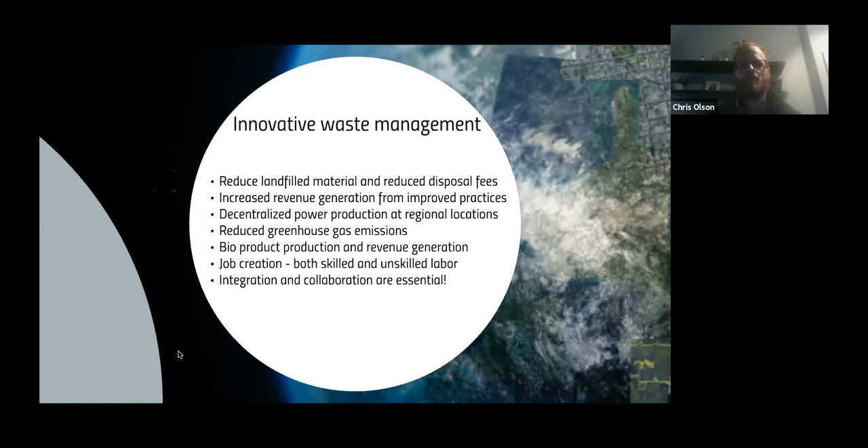I really am grateful through this project, and with one of the colleagues who put this project together with me—he was actually the guy who introduced me to Marc—Tom Ogarenko. We've really tried to focus on integration and collaboration as being essential to making this work, not just the technology, but the skill sets and expertise. That's really a focus of what we're trying to do with this project.

So the solution we're looking at is the All West Bioindustrial Park, located off 75th Street and 64th Avenue here in Edmonton. You can check us out at awbip.com. My company, IRSI, is shown on the top right, and All West Demolition is a prominent demolition company that's the lead applicant on the project and is home to the location we're at.

Nelson Environmental Remediation is a leading soil remediation company with technology very similar to what we operate for indirect pyrolysis. And I can't stress enough the support we've gotten from Alberta Innovates, not just from their funding group but also from their applied research arm, InnoTech Alberta. They've helped us with this project and with other projects in the past, and I can't speak highly enough about the support I've gotten from them.

The All West Bioindustrial Park is intended to be an industry-led bioindustrial ecosystem aiming to drive commercialization of innovative technologies, processes, and products through the collaboration of business, academia, researchers, and government.

When I got started doing this about 6 years ago, after I'd fabricated my first system, we looked for about 8 or 9 months to find a space to field demonstrate the equipment. It was really quite a struggle just to be able to get somewhere and do some testing, and essentially find out that we had built something that didn't work all that great.

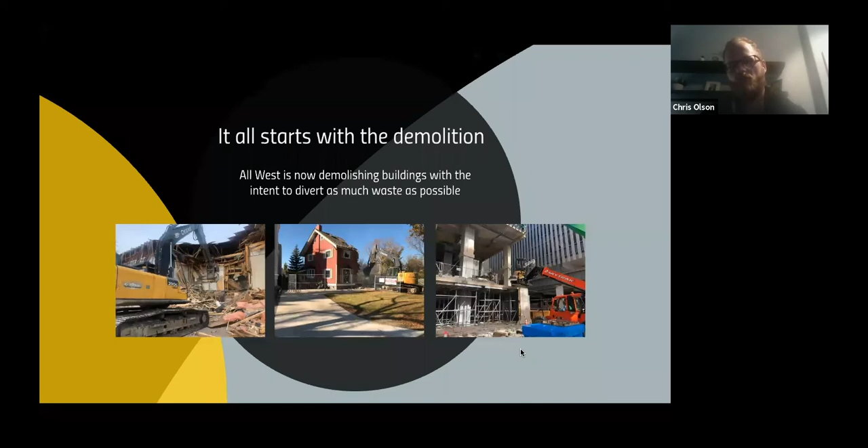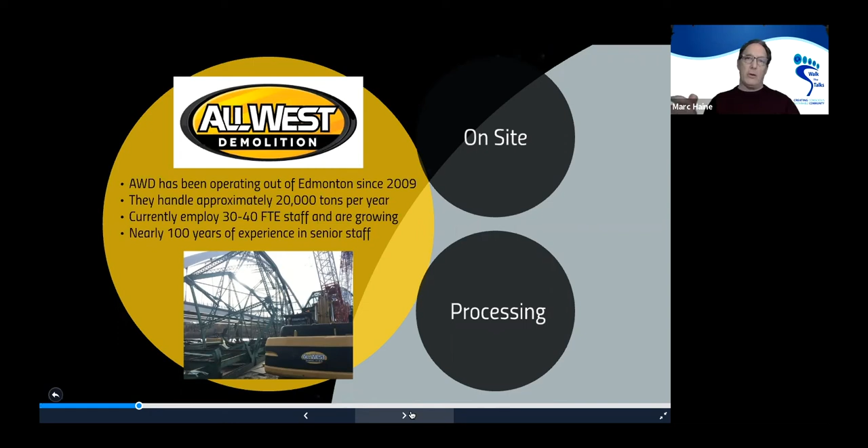And I think it saves them some money as well, doesn't it? A little bit more labor on the upfront, but then they can separate the concrete and get money for that, as well as then separating out the rest. Yeah, 100%. And that's what we're trying to add, giving an option for the biomass material, because for concrete and metal, there's a market for it.

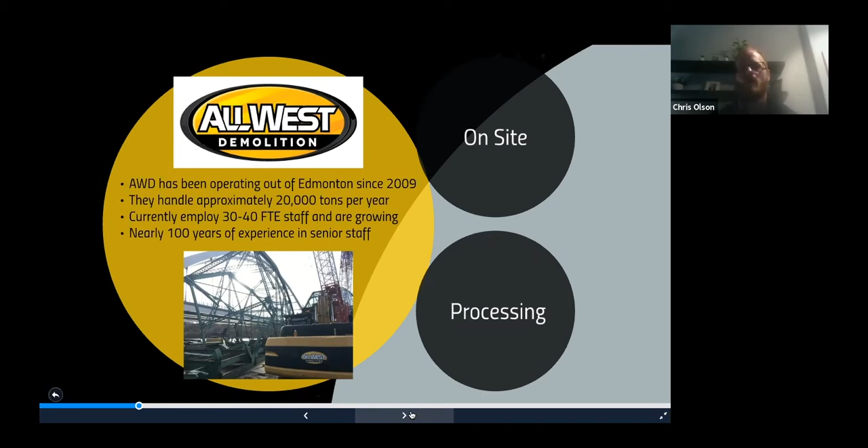So once the material is brought to the yard, that's where we start processing it. The front end pre-processing is done by All West for us at the site. They'll do manual sorting of waste streams. Some of their operators are quite capable with an excavator, much better than I could ever be operating that heavy equipment, and they'll actually start pulling out large pieces of wood material that we can separate out into our clean wood pile for our pyrolysis process.

They'll also do shredding of the material to get it to an appropriate particle size. Our gasification equipment needs about 4-inch nominal, so average size under about 4 inches, whereas our pyrolysis process, we wanted about 2 inches. So different materials going into different systems will shred to a different particle size.

They'll also trommel our material, so they'll screen out some materials. The fines that we get actually have some applications for different sites. Some landfills will take the fines as an alternate daily cover, which helps control odor at the landfill and helps with gases leaching out, that sort of stuff.

So what we're also trying to do is really sourcing different uses for these materials that we can't process ourselves. Once we get it, our goal is to really landfill nothing. Now, we're not there yet, but as we go through our process, we want to identify as many opportunities for any of these other residual materials that we don't particularly have an application for. We've talked with different biocomposite groups, and with people doing things around improved concrete, reduced carbon intense concrete applications, and there's potential uses for a lot of this stuff that we can get out of the site.

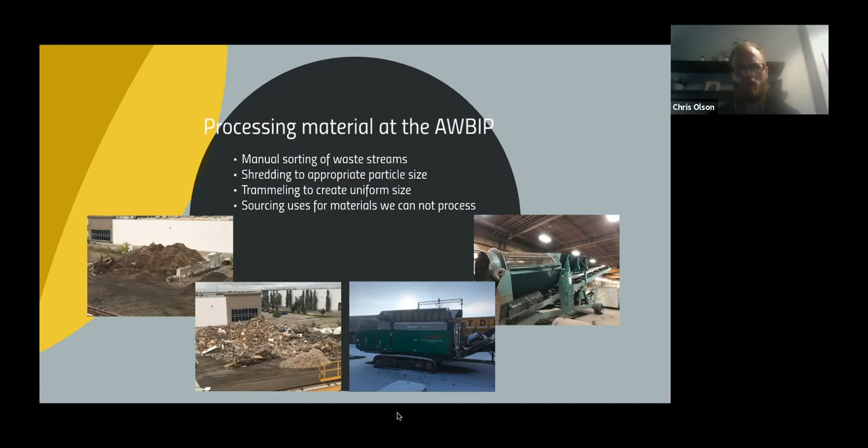Nelson Environmental Remediation is a key partner in this project as well. NER was an Alberta born and bred company that has been operating since the 1980s. They're globally recognized as leaders in direct and indirect soil remediation. They do a lot of work all over the world, a lot of work in the United States, and they have projects in China. They actually don't hold any patents on their technology, which is kind of interesting - it's all trade secrets. So you could copy their technology, but you don't know how to run it. The skill set and expertise that they have goes a long way, and we've been very fortunate with Warren Nelson specifically supporting us with some of the work that we're doing.

Warren and his brother Daryl have led NER since 1994. They currently maintain the largest fleet of thermal desorption units in North America. I'll explain what those thermal desorption units are in the next slide. Many of their upper management staff individually have 25 years of experience.

Over the last few years, they've been developing a focus on environmental stewardship, and part of that is what we're doing with them at the site. If we can find them an alternative low-quality biomass material that could replace diesel, propane, or natural gas, then that has value for them and other benefits as well.

Their indirect thermal desorption units are very similar to our piece of equipment that we're running at the site. So what exactly is an indirect thermal desorption unit?

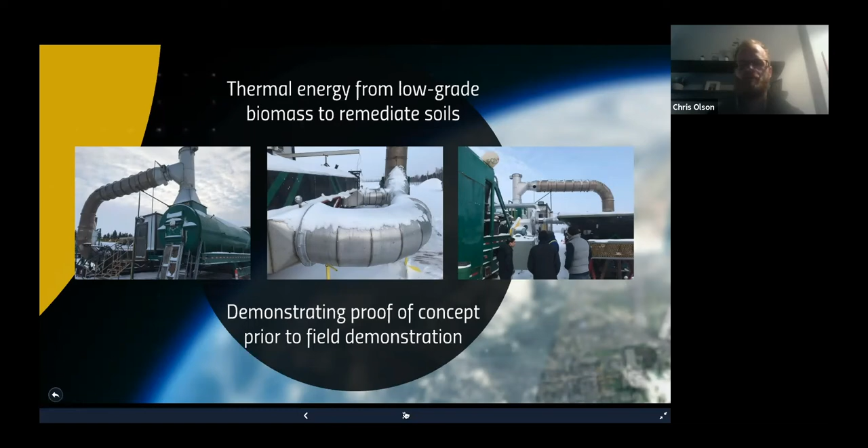So another part of what we're doing at the site, I mentioned Tom a little bit earlier, Tom Ogaranko, had worked with Marc in Devon and had done some of the challenge dialogue work. That was when I first met with Marc, actually, probably about 5 years ago now. I believe it was 4 or 5 years, I think it was January 2016.

So the challenge dialogue system, and some of you might have had some experience with that process, is a proven framework to help diverse groups collaborate and innovate to accomplish complex tasks for change and transformation. The real great piece of the CDS methodology is that it's for problems or challenges that there aren't readily available solutions for, that typically need a number of perspectives to get a good handle on.

The example I'll use to walk you through this 8-step wheel, we looked at doing a waste characterization challenge at the park when we got started. We identified early on that we need to identify the different composition of waste streams coming into the park. So if there's a construction and demolition bin, if we can tell that approximately 60% of that bin is biomass, it's worth us picking out that wood material. If it's 20% biomass, it may not be worth it. So we wanted to be able to identify waste streams as they came into the site.

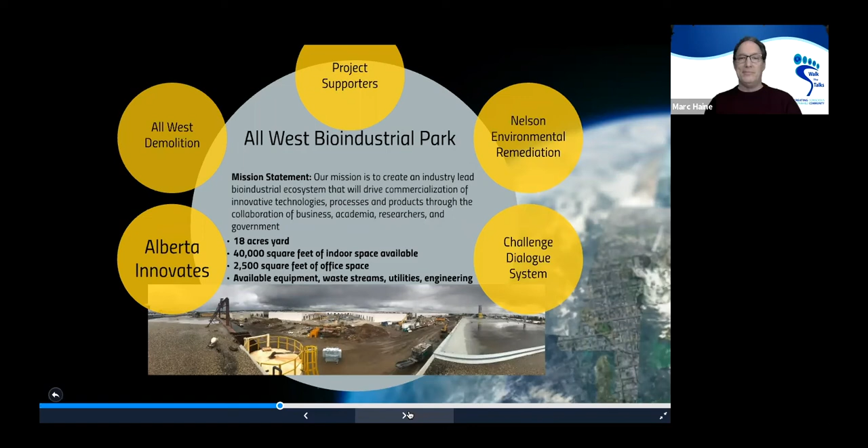So just so you know, the challenge dialogue that we did in Devon was the catalyst for Walk the Talks, because after we had finished off with our challenge dialogue system process, we realized as residents that we still had a ton of questions. And so Walk the Talks was formed because of all the questions that happened out of the challenge dialogue. Yeah, and that's typically what I've seen is that sometimes you don't even know you have the questions until you go through the process, and then there's all these other things that kind of come up.

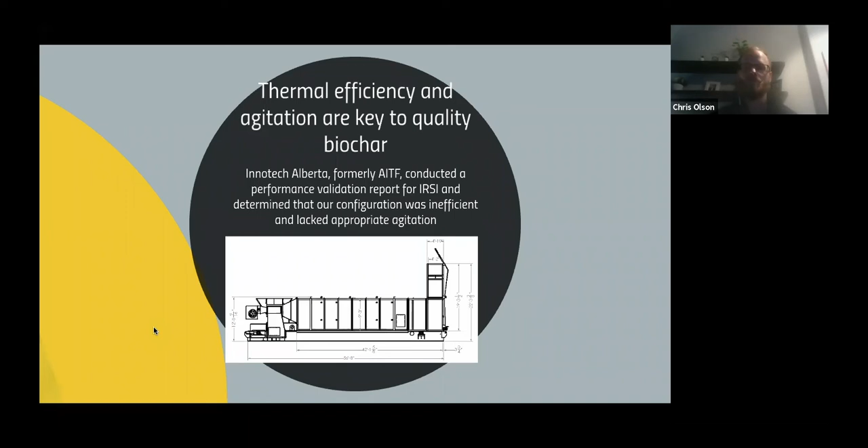Now that seems like a huge waste, but with the thermal energy we were using, we were still able to produce a fairly good biochar, so that was positive for us. But we definitely sat back and thought we could come up with a better way to configure the technology.

So the positive takeaways we had: we did produce a really high quality biochar. It met class 1 IBI standards, which is above 60% carbon. The biochar you see in that photo was about 80 to 83% carbon, so really quite a high quality product.

When we had the technology running properly, it came out fairly consistent, and we were able to produce fairly high volumes compared to other technologies we've seen in the market. We got about an 80% reduction of feedstock by weight, and there was an abundance of usable thermal energy at that site as well.

That 80% reduction of feedstock by weight is a bit of a double-edged sword depending on what you want. If you're after high quality biochar, you want the highest amount of remaining biochar possible, so you want that reduction lower. If you can get 30% of your solid byproduct coming out as biochar, that's terrific. But if you're just looking to get rid of waste, not focused on producing raw biochar but rather treating waste materials, then getting as high as a 95% reduction is even better, since you're just getting rid of more material.

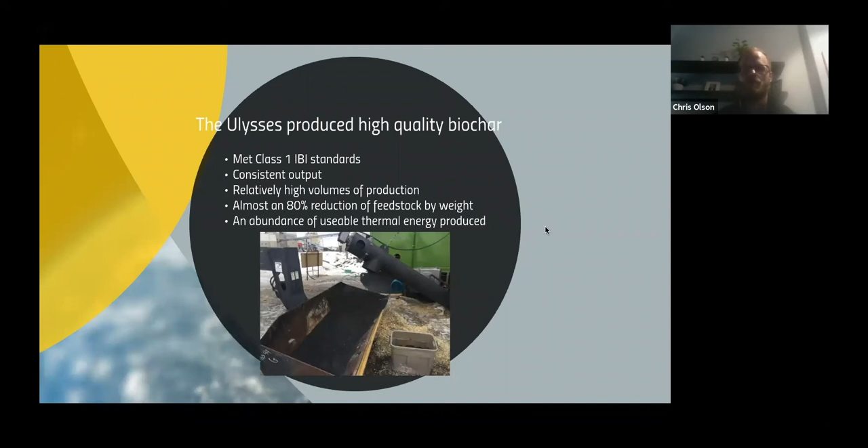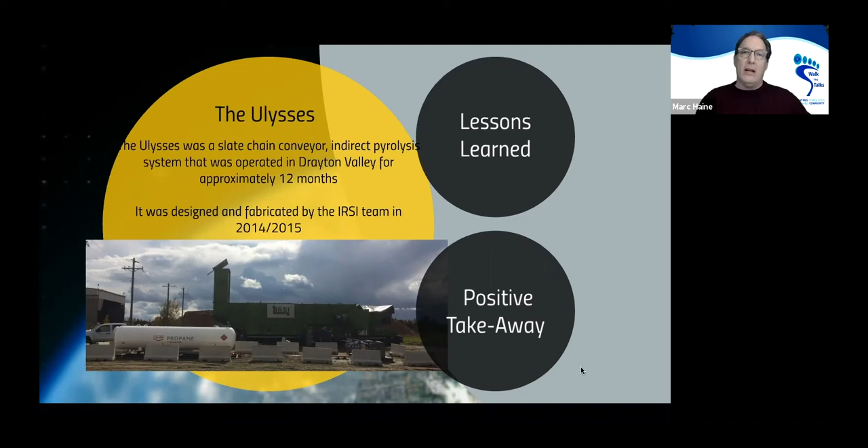So this begs a little more emphasis, because what you're saying is out of 100 tons of waste product that goes in, you end up with only 20% of that as leftover product. That's huge. That thought right there is what hit me when I was running the capstone project with Nate — if we can get rid of 80% of this material, even without a saleable product on the back end, that seems like a very viable activity to undertake. We're fortunate in Canada to have a lot of space, but eventually we're going to stop wanting to landfill material. If we can reduce that material and get some value out of it, it's huge. That was the genesis for me.

So I've talked about our technology and where we're at. Let's look at what exactly raw biochar is. But first, since you mentioned the process, how long does it take from beginning to end? Our indirect rotary kiln system, running with about 25 to 30% moisture in the wood material, takes about 26 to 29 minutes to run through the process. Depending on the technology used, how much the material is agitated, and moisture content, that'll dictate how long the process takes. You can run very fast pyrolysis processes at high temperature that fully char material in under a couple minutes.

We run closer to the slow pyrolysis process. Part of the balance is that the higher the temperature and the quicker the time, the more gas and liquid fuel you'll get out, and the less solid byproduct — so less marketable biochar after. There are companies whose focus isn't on the solid biochar. One out of Quebec, Abertech, runs a retort auger focused on producing usable syngas. Here in Alberta, in the land of oil and gas, I don't see as much value in that syngas, so we consume it all in our process. We want the raw biochar. The slow pyrolysis process, with a longer residence time and milder temperatures around 400 to 500 degrees Celsius, gives us a higher output of biochar. That's our focus.

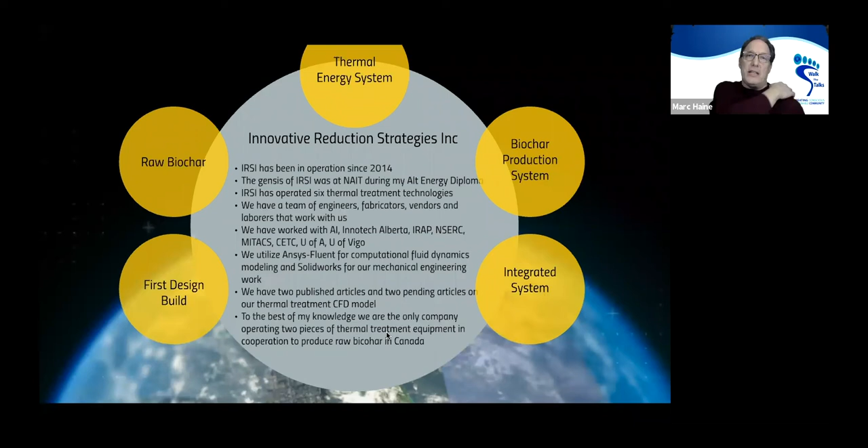Okay, I'll let you continue with the presentation. I'll save the rest of the questions for the end, since you might answer some of this as you go on to talk about the current system.

So, what is biochar? It has been used for millennia as a soil amendment. One of my favorite stories is when the conquistadors first came into the Amazonian basin — driving up the river, they were floored at how densely populated the communities were along the river basin. They eventually found out the soils were so rich and fertile because the people used a biochar process to create what they call terra preta, or black earth. This terra preta was essentially char mixed with compost and other waste materials to make a rich fertilizer. To this day, in that part of the world, that product is still dug up and sold as fertilizer.

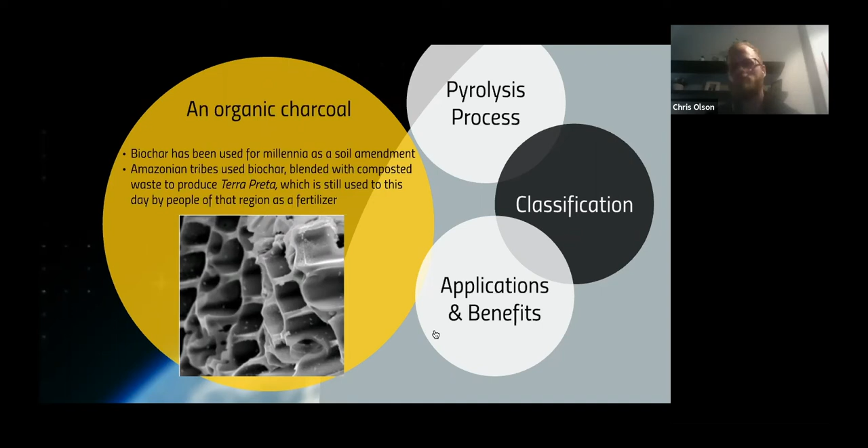This photo here is a microscopic image. Essentially, biochar is a big empty hotel — it's empty space, very porous, anywhere from 100 to 900 square meters per gram of surface area, depending on the type of char produced. If you want a high quality soil amendment, you have to blend it with something — it's not a fertilizer on its own, it's a soil amendment. It adds value to the soil, helps reduce compaction, helps retain water, and gives a home for microbial life. But on its own, it's not a miracle fertilizer. The best scenario is to blend it with compost or nutrients, so it acts like a sponge — the empty hotel, as I like to call it.

So the pyrolysis process, going back to some of those questions we had earlier: it's high heat in a low oxygen environment. There's a spectrum on the thermal treatment process that goes from flash pyrolysis and gasification out to slow pyrolysis, and then down to torrefaction.

Torrefaction starts anywhere over about 275 degrees Celsius up to about 350. Pyrolysis starts anywhere from 350 up to about 800. And then you can get into more high temperatures in gasification and flash pyrolysis, up over 800 degrees Celsius.

So where we run is around that slow pyrolysis, about 30 minutes through our process, and we operate at about 400 to 500 degrees Celsius. The real key thing with the thermal treatment is to avoid oxygen in the environment.

You want to prevent any oxygen from getting into our rotary kiln so that we're not actually combusting the wood material, we're cooking it. So we're baking it, we're getting the syngas, we're volatilizing off that syngas, which leads to the porosity and surface area in the solid biochar.

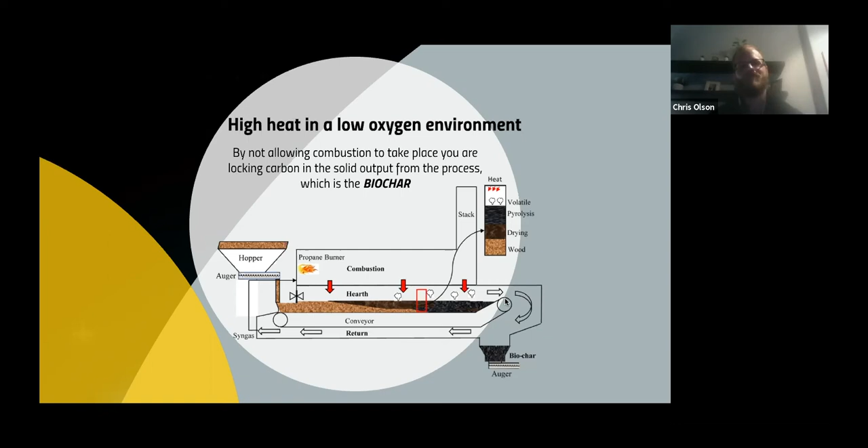Again, as you can see looking at this, thermal efficiency was an issue. Heat rises, so putting the combustion chamber over our hearth really did make a lot of sense, but these are lessons that we learned through the process.

There's kind of two key classifications that I wanted to touch on, in terms of what are the standards for biochar and what makes a good biochar. One of the issues I see with the biochar space—pyrolysis, these thermal treatment technologies—is right now we don't have, in my opinion, a very good standard for what a good quality biochar is.

At a surface level, biochar is very simple: it's carbon for the most part, it's porous, it's inert, and it's got a high surface area. But once you dig into it—say you want a biochar for soil amendment, there's certain characteristics you want in that. Say you want a biochar as a feed additive for cattle, there's certain characteristics you want in that biochar.

There are guys I know who are working with biochar as precursors for activated carbon production, to get into supercapacitors on the cathode and anode, increasing surface area and improving efficiency of those products. That's a totally different ballgame—you want CEC, different applications in your biochar. I know guys looking at biochar as a precursor for graphene production. Again, different characteristics that you look at.

So one of the things I'm hoping, out of the work we're doing and other guys working in this space around the world, is that over the next 5 years we see more of these standards being adopted and accepted by everybody, and it becomes more of a fungible commodity—so that if you're producing biochar in Australia, it's comparable and measurable against biochar produced here by us in Alberta.

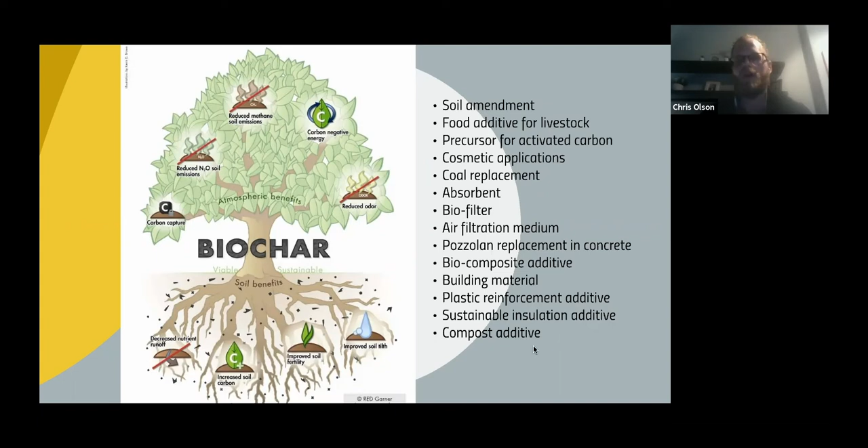So this is the distinction of our process. If you remember the photo of our first piece of equipment, we were running a big propane bullet - this essentially has replaced that. Rather than using propane, natural gas, or any other petrochemical product, we're taking low quality residual biomass that otherwise would be landfilled and using that to get our thermal energy, which then drives our other processes.

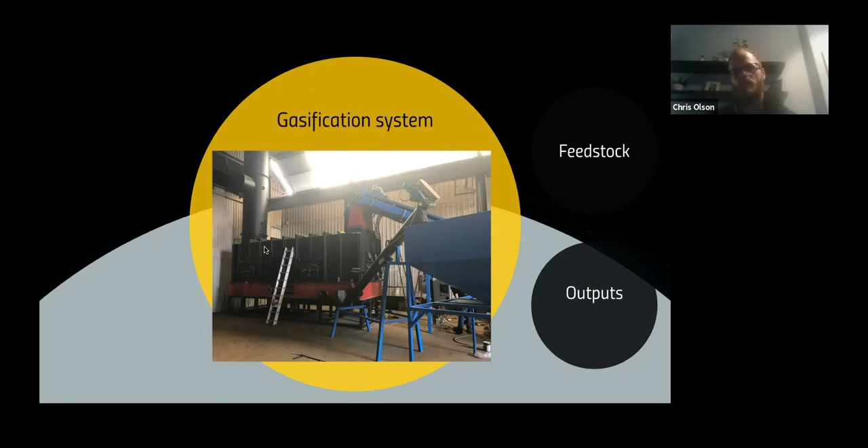The feedstocks we run are, again, lower quality materials, lower quality biomass. This is a mix of a construction and demolition pile - we pull out some of the material we can use, the lower quality wood material and lower quality biomass streams. We shred them, process them into the right form, and run that through the gasification technology.

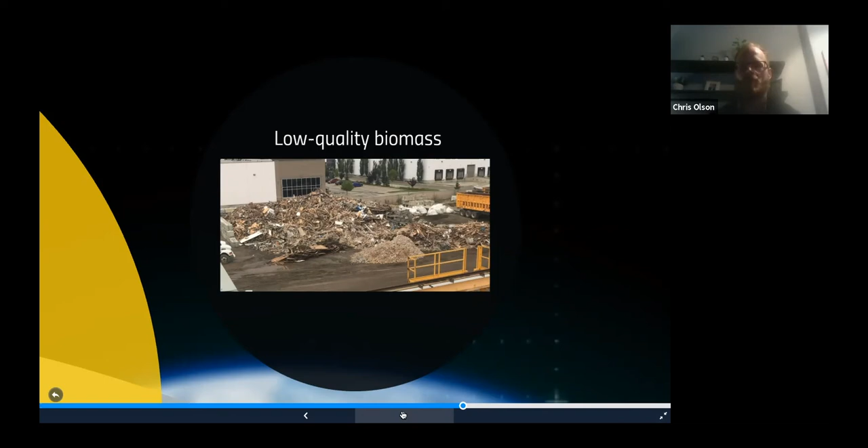The outputs: you get a low quality char with a lower carbon content and a much higher ash content, partly because there's a partial combustion process taking place, but also because the original feedstock has a higher ash content. There are also higher levels of contaminants in that material.

And there are some lower value applications for it - it could go into an ADC, or some blends into a concrete application or something along those lines. But typically this is a pretty low quality product that doesn't have a lot of usable value. What we do get out of it that we can use at the site is the usable thermal energy.

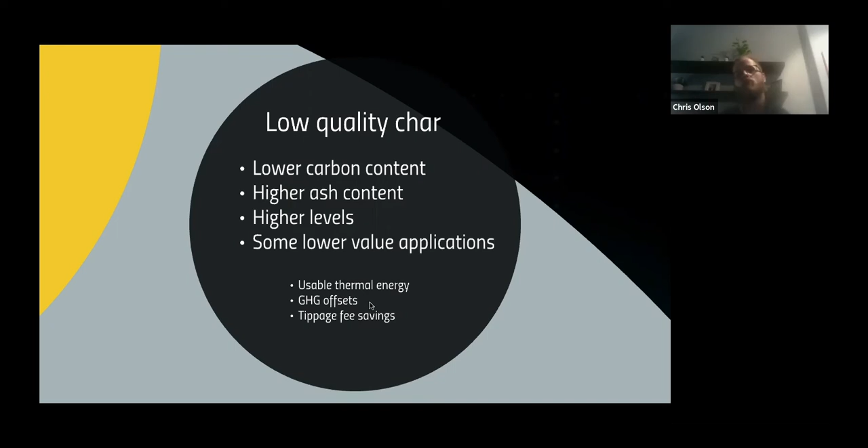And if we had a technology, or somebody wanted to bring a technology to the site to produce electrical energy from that thermal energy, we'd be willing to entertain that. We're not doing it ourselves because it's a little bit out of our swing zone, but we've had conversations with companies interested in doing that. It also leads to some greenhouse gas offsets and overall reduces your tippage fee at the landfill.

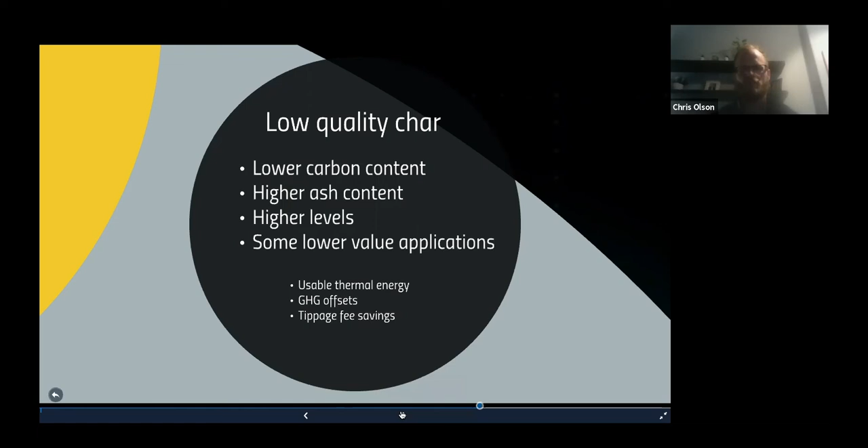The rotation increases the agitation, so that's how we improve that agitation from our first piece of technology. By rotating the material, it's constantly moving, so it's constantly exposed to more heat.

The other thing that we did through that process to improve upon our technology was the thermal efficiency. So rather than having our combustion chamber sitting above the area where our pyrolysis process is taking place, we have the combustion chamber, or the heat box, right around it. So we're getting an even thermal distribution, and a better temperature profile through that system.

So feedstock, a bit different from what we'd run through the gasification system. This is clean wood, agricultural residues, byproducts that come out of agricultural sites. We've run hemp, we've run hurd material. One of my partners is a farmer in the Ponoka area, so we've run some canola. We've done some different tests with that sort of material. And then what you see here...

So some of the sites that All West will be on, there will be some trees they have to dig up, and they'll separate out those materials, and that's what we get. If we can pull out clean wood material from construction and demo piles, we'll do that as well.

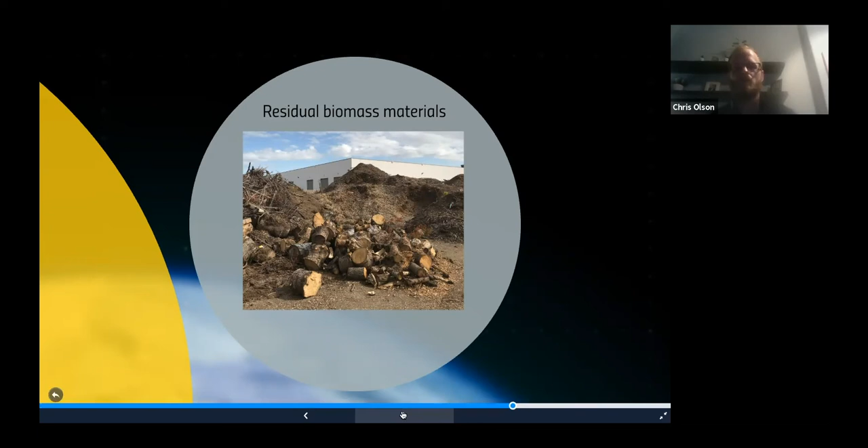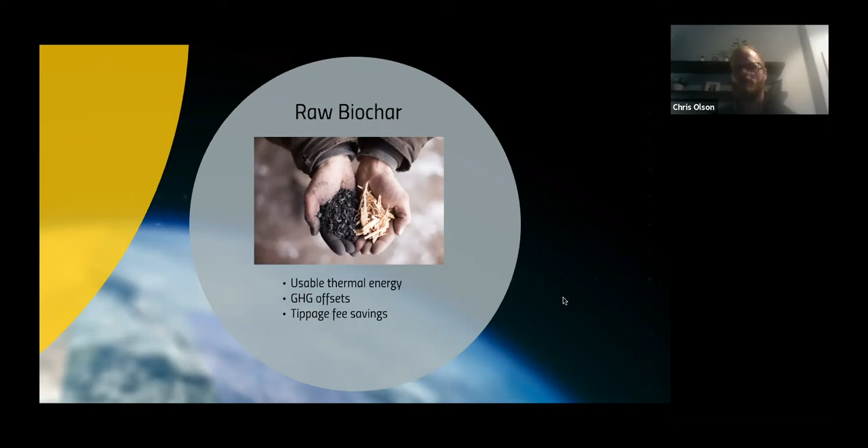If you crush it, it should be pretty brittle, and if you dust your hands, you'll be able to get it off fairly easily. That's an indication you got a pretty good biochar, and it shouldn't have any smell. If you get a sour or nasty smell coming out of it, there's still some volatiles in there, so it should be a pretty dull smell. So if you ever see anybody working with biochar sticking their nose in it, that's probably what they're trying to check for.

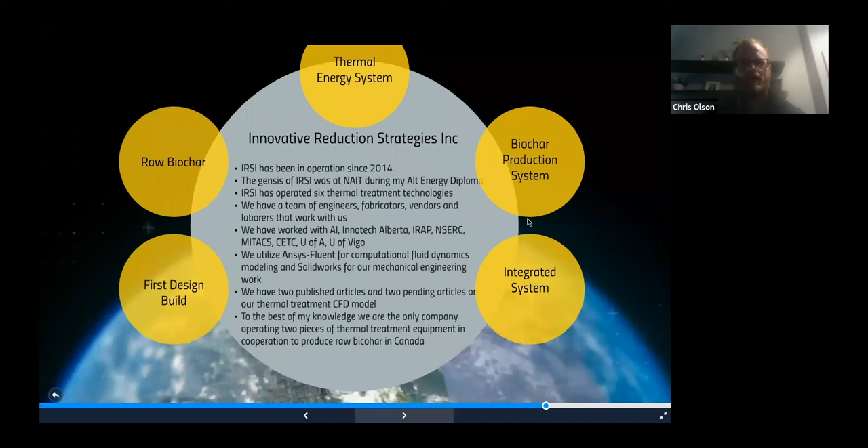We're a little bit further ahead now. Our goal here, if all of this virus stuff hadn't happened, by now we would be producing and inventorying biochar. But by next week, we'll be driving heat into the indirect pyrolysis process, and we'll be going through that hot commissioning phase.

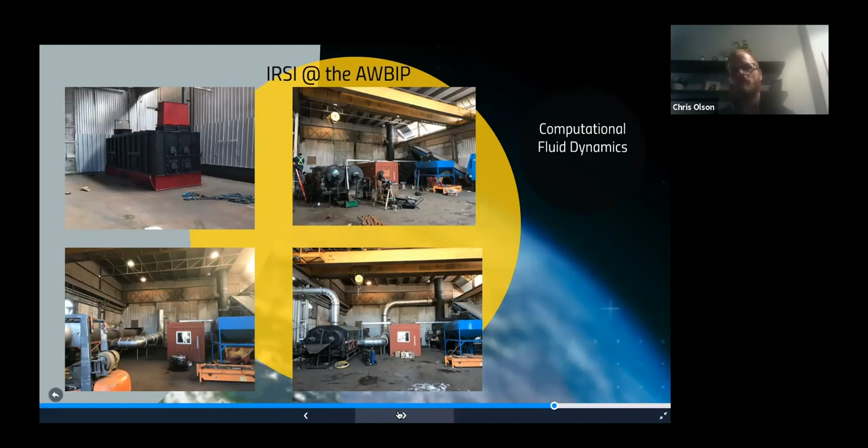So the one other thing that I did want to touch on with the integration of the technologies: how were we able to do this as quickly as we were?

That's part of the process for heating the material. In lab settings, you want to control that heating rate. It's a little harder to do at full commercial scale, but if you're able to, you can improve the quality of biochar you output. With this CFD modeling, we were able to position our ducting and exhaust ducts so we can control that thermal profile.

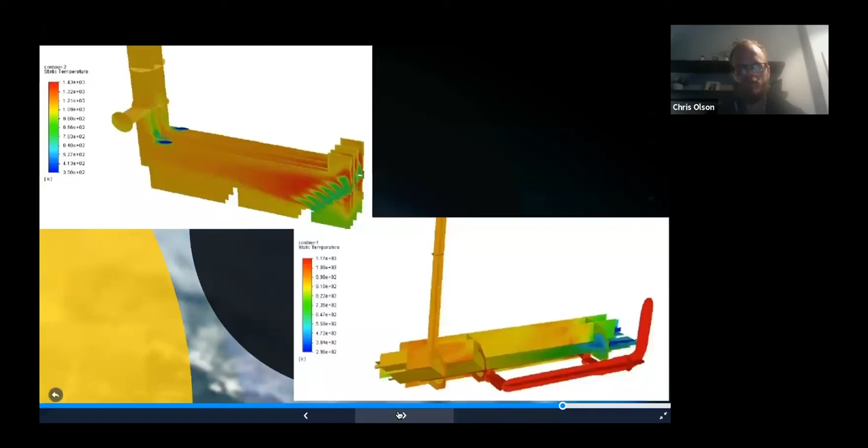The markets we have access to or are pursuing cover what All West is after, what we're after, and what Nelson Environmental Remediation is after. The total addressable markets through Alberta and North America is about $6.5 billion. Obviously we won't access all of those, but waste diversion in Alberta alone at $70 a ton is under $300 million a year. Biochar, based on studies I've looked at - not including China, but North America and Europe - is about $160 million a year in value.

Soil remediation in Alberta alone is $2 billion worth of addressable market. Activated carbon globally is about $4 billion - it should say global market there, not North America. So if we can get our raw biochar into an activated process, there's a tremendous amount of opportunity there as well.

A couple things I touched on already - specific trials we've worked on: we got the biochar pellet with comparable energy density to coal, we've done air filtration, and we've had successful trials with our raw biochars as organic growth medium for cannabis. We've got a couple other applications we're working on right now, including bedding as an absorbent for chickens.

We've done some pozzolan replacement, replacing the aggregate that goes into concrete with our biochar, and that's been very successful. We've also done full germination bioassays for soil amendment, so our raw biochar has shown that you can grow food in it quite well.

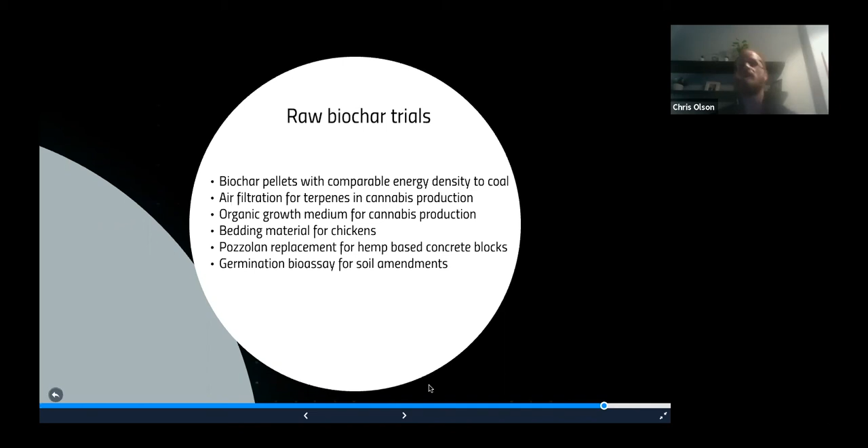Right now we're in the process of launching our first product - this is the packaging for our raw biochar. Had the virus not taken place, we'd be bagging up these packages and hopefully looking at home and garden shows in the spring. It's being pushed to probably the middle of summer now, but we've gone through this whole branding activity with a terrific firm working with us. This will hopefully be the package you guys will be able to find in supermarkets at some point in the future.

So biochar price, there's wholesale versus retail, and the price will range. Tom Miles, who's the executive director of the USBI, did a good presentation that he was very gracious to share with me. Tom identified that you're going to range from about 16 cents to $2 per pound, or about $312 to $4,000 a ton for wholesale product of biochar. Again, that depends on a number of things - characteristics of the biochar, what its application is for, and a number of other things that would go into that.

The last report that I saw from the IBI in 2016 found the average price around $3,300 per ton Canadian. These are all Canadian prices - I had to do some conversion because Tom's American. And then the low volume retail packages - for some of the guys who are selling 1 kilogram bags in the store, that'll be as high as $13 per kilogram. So you can get quite a high return if you're selling those lower volume packages versus the wholesale by the ton.